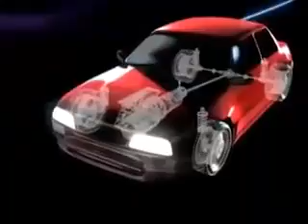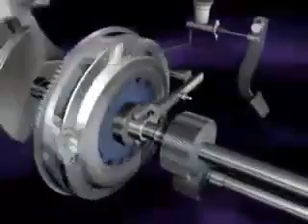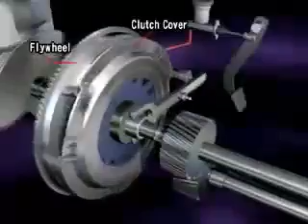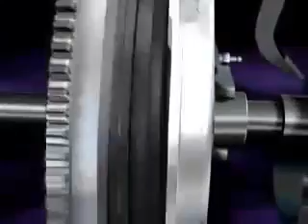The clutch is a mechanism that smoothly transmits and cuts off engine power to the transmission by engaging and disengaging. The clutch cover and flywheel always revolve together with the engine. When the clutch cover pushes the clutch disc against the flywheel, engine torque is transmitted to the transmission.

When the driver steps on the clutch pedal, it releases the pressure plate that was pressing the clutch disc against the flywheel, disengaging the clutch disc. In this state, engine torque is not transmitted to the transmission. The clearance between the clutch disc and pressure plate when disengaged is approximately 1 millimeter for passenger cars and light commercial vehicles, and 1.5 millimeter for medium and heavy commercial vehicles. This engagement and disengagement is the basic principle of a manual clutch.

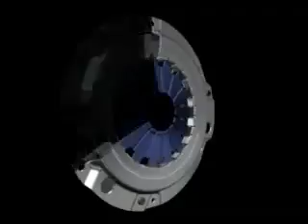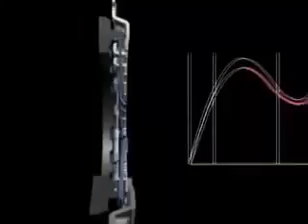The clutch cover's diaphragm spring is a disc-shaped spring that presses against the pressure plate and controls the amount of pressure applied. The amount of force that presses on the diaphragm spring is called the compression force. The graph that shows this change in compression force is known as the clamping load characteristic. This indicates the clutch disc's usable range. If wear exceeds this range, it will be impossible to obtain the necessary compression force and the clutch will slip.

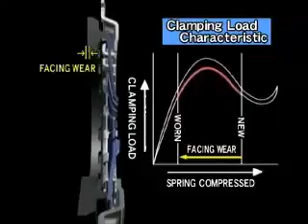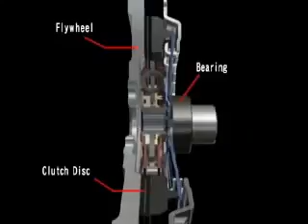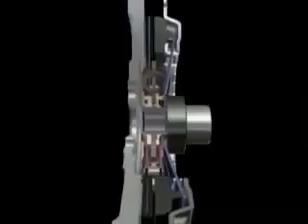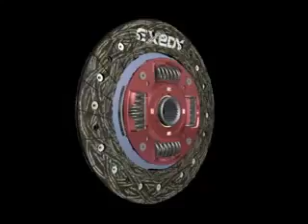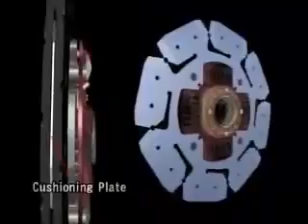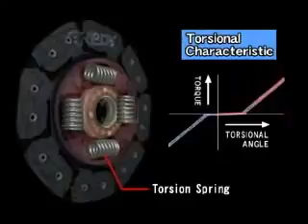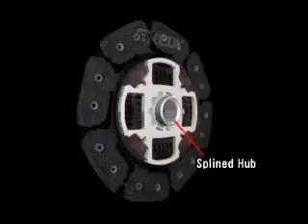Next, looking at the clutch disc assembly, engine torque is first transmitted from the pressure plate to the facing material. This facing material is supported by the cushioning plate, which makes half-engaged clutch control possible. Engine torque is transmitted to the retaining plate and clutch plate, which hold the entire assembly together while actuating the torsion springs. The primary function of the torsion springs is to absorb fluctuations in engine revolution. Finally, engine torque is transmitted to the transmission via the splined hub.

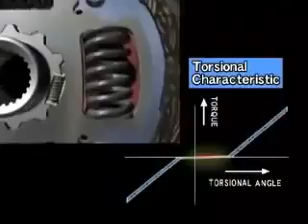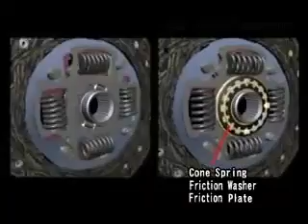Fluctuations in engine revolution while idling are absorbed by this two-piece splined hub, which is coupled with several small dampening springs. It functions to prevent a chattering noise when fluctuations are transmitted to the transmission. The shock from engaging the clutch while accelerating is absorbed by torsion springs like this one. The cone springs, friction washers, and friction plate function to quickly stop the torsion springs from vibrating, reducing both noise and vibration.

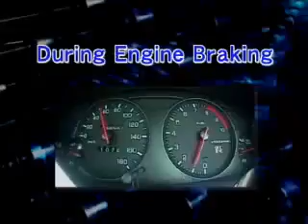During engine braking, the torsion springs are compressed in the opposite direction compared to when accelerating to absorb the shock of deceleration. When driving at a constant speed, fluctuations in engine revolution are absorbed by the torsion springs and friction washers. This reduces the amount of chattering noise transmitted to the transmission and the differential gear.

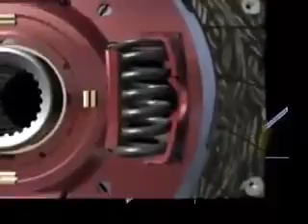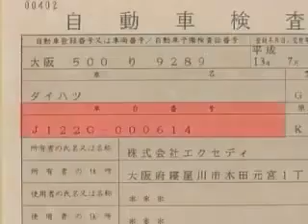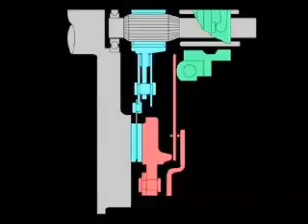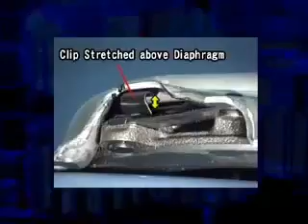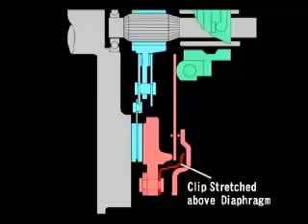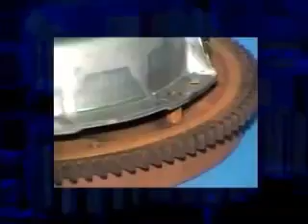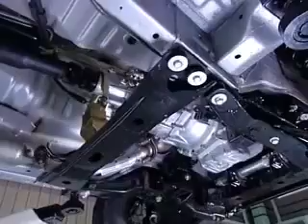The clutch cover must also be handled with care. If it is dropped, the clip could become bent, impairing disengagement performance or causing chattering noise. More severe deformation could shift the position of the dowel holes and make installation impossible. After securing the transmission with the transmission jack, pull the transmission off and lower it so that the crankshaft and top shaft are aligned along the same axis.